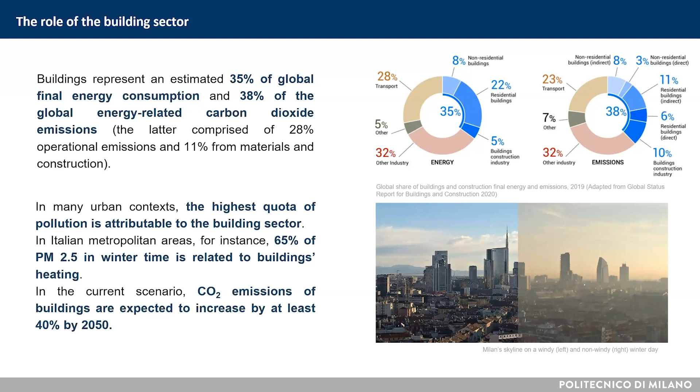65% of particulate matter 2.5 pollution in winter time is related to building heating. And the CO2 emissions of buildings are expected to increase by at least 40% by 2050.

The overall building stock currently accounts for around 245 billion square meters, and more than half of the existing stock is likely to still be in use in 2050. So the energy renovation of existing buildings is a key element to shift to low carbon buildings.

Obviously we also have to deal with new buildings, especially in some countries like those in Africa, mainly developing countries. But in other countries like North America and Europe, the main focus will be the energy retrofit of existing buildings.

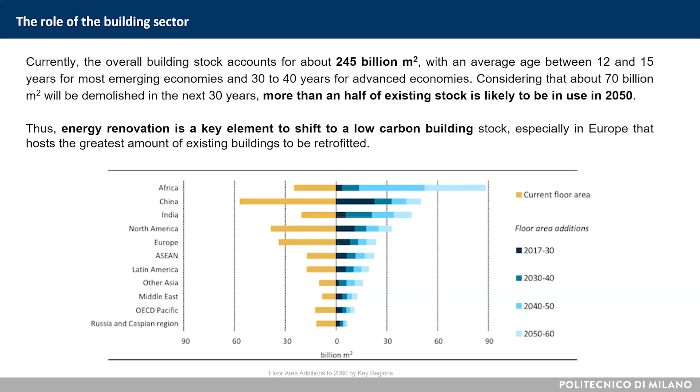First, we have to maximize the building's energy efficiency, mainly with passive strategies. Second, we have to adopt high efficiency technical systems and advanced control management strategies. Third, we have to maximize on-site or nearby renewable energy production and self-consumption.

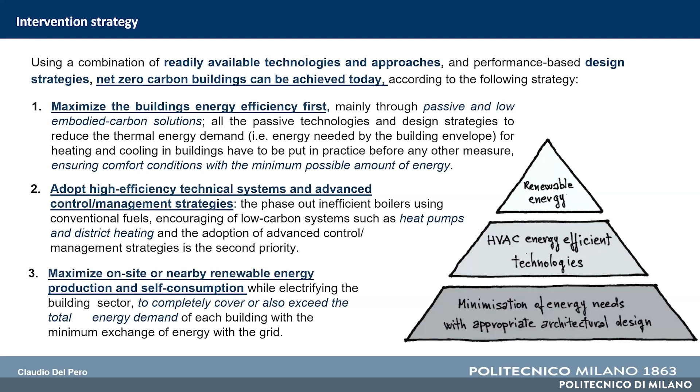Following this strategy, we can transform existing buildings into nearly zero and net zero carbon buildings. So how can we do it? We need an energy manager. We need many energy managers.

As you know, the energy manager is a pivotal person whose task is to manage everything related to energy in a company, in a public body, or in any kind of structure.

The energy manager must verify the energy consumption, optimize it, and promote interventions aimed at energy efficiency and the use of renewable sources. The scope of the energy manager is to analyze and assess an existing building.

The energy manager assesses how the existing building or structure is consuming energy, and puts into practice all the interventions and strategies to strongly decrease this energy consumption and increase renewable energy source utilization.

That's why we think this course, Energy Management for Real Estate, is particularly timely and important right now. More in detail, today you will attend this webinar, a practical application on how you can apply your knowledge to an existing industrial building to strongly decrease its energy demand.

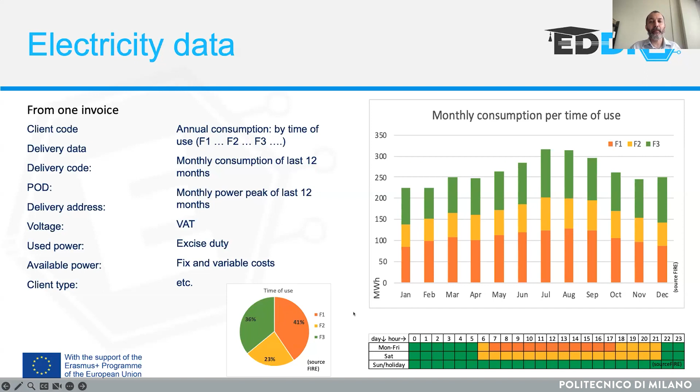But you can also usually get hourly data. The point is you may get these hourly data—this is data of electricity, for instance, coming from the grid. Looking at this, 00 is midnight.

You see it's a bit of a strange situation, because in this real case there's a lot of consumption at midnight. This should make you think, and eventually you can also see that this user doesn't buy much energy from the grid.

So you need other data to see what the hourly consumption actually is. In this case it may come from a combined heat and power cogenerator following the electricity demand. It goes on, then produces, then at a certain point when the heat demand is lower, or there's no heat demand, it goes to zero—but it never produces more than the electricity need of the site.

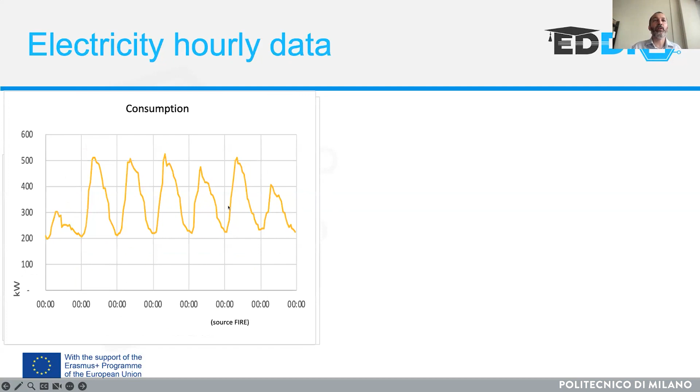We'll concentrate on this yellow curve, and you'll have quarter of an hour or hourly data. Then, what can you do with this data?

Well, there are a number of things you can do. I see that some of you are used to having this kind of data—so what can you do with it?

Something quite simple when you have this data is to prepare a load duration curve. In this case it's very simple to make. Think about how you would construct this kind of curve—you can see that it's always going down, so you may understand how to do it.

Otherwise, I will tell you in a while. You can see this could be very useful to see the peaks, how many hours or quarters of an hour you have those peaks each year. And then you can do some averaging.

The monthly average, so average month by month, the daily curve hour by hour by month, or the average day of the week yearly. So you can see that Sunday there's not much consumption, but there's some kind of activity on site.

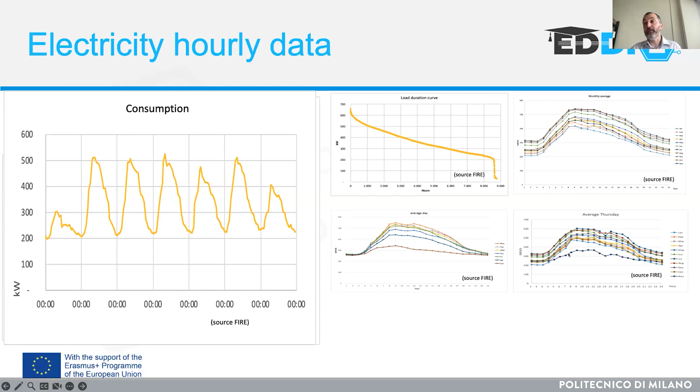Saturday is a bit different, and the other days are quite similar. And then you can focus on a particular day and see how this changes month by month. You see, for instance, there are some months, the colder months, where you may have some maintenance, or less consumption for cooling, and so on.

And then you can also do something like this with all of the data. This is also called a carpet plot. So you are visualizing in just one image all of the 8,760 data points, and you see how it goes during the year, but also during the day, and if there is any kind of strange data here and there, you can immediately spot it visually.

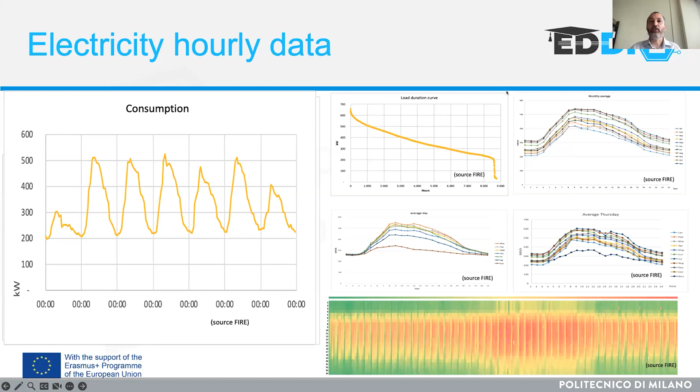This is very easy to do - you just do conditional formatting in Excel. And this one, the load duration curve, is just ordering the numbers from the highest to the lowest one. You can do similarly.

You do this for natural gas data, and here you have the monthly consumption, but you can also have hourly consumption. Now, at least in Italy, we have hourly meters, also if you are a large user, with correction not just for temperature, which is already standard for domestic users, but also for the calorific value of the natural gas consumed. So that could make the data much more reliable.

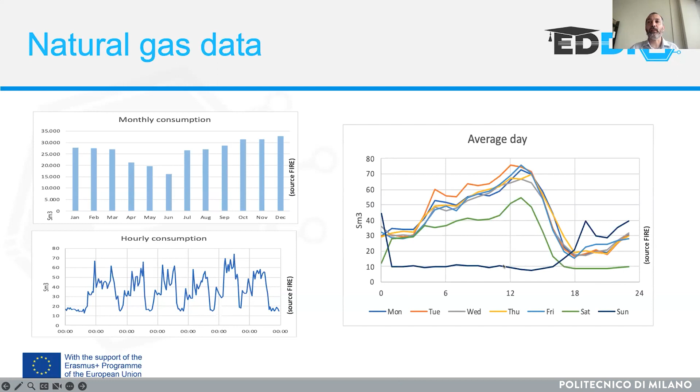And here again, we can have an average daily use, and you see that on Sunday there is some kind of activity at a certain point. So these are the energy vectors, but you can also have liquid energy vectors like oil, gasoline, and so on for transport. It depends where it is located.

Now we are also looking for relevant variables. So if you are in a process, typically it's the production - the number of product by day, by month, by period of time, and the mix of product.

But please also try to think of other relevant variables, the variables that are influencing the consumption. This could also be, for instance, the number of work shifts or man-days - other variables you may like to use. And if you have important consumption for heating and cooling, typically the outside temperature could be important, also in some cases for the industrial production sector.

But it's usually one of the most important relevant variables for buildings alone, along with the humidity and work shift or opening hours, also for the buildings.

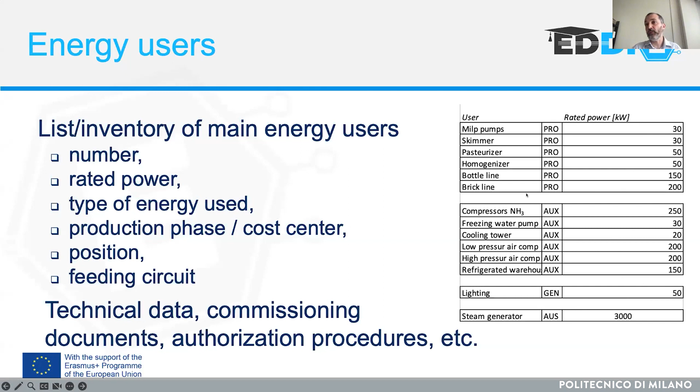So you may get something like this - a list of users, where this is for production, auxiliary services, general services, and auxiliary, and the rated power of those kinds of systems. The first part are just, yeah, all of these are electric powers.

If you are looking for a process, you will ask for a site layout, so you see the productive lines, because usually there is more than one. This is just different steps, but one kind of path. In other kinds of production, you may have different paths. This is simplified, but in reality, you may have different paths for different kinds of products.

Then you are receiving the raw materials or semi-finished goods, and there could be a warehouse, eventually a cold refrigerated warehouse for this kind of material. Then after production, you have palletization, a refrigerated product warehouse, and then shipping. So you receive and then you ship the products.

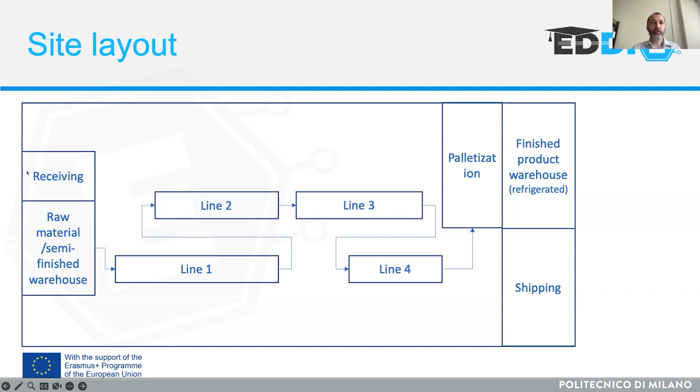But then you need to look at all of the systems and services you need for production: water, and usually also softening of it. Usually in industrial sites you have a well, while in buildings you are connected to the water network. Then there is a boiler room, air compressor for industry, chillers room. Then for internal logistics, the forklift, so the charging station, and the electricity transformer. All of these have different distribution networks for electricity, compressed air, hot water, steam, chilled water, and so on.

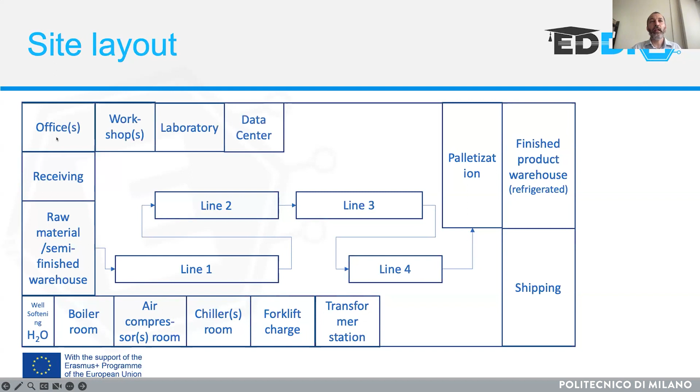Then you have offices, workshops, laboratories, and a data center is always present, smaller or bigger, here and there. And then you have the HVAC for offices, data center, and eventually also for the production parts, the lighting. So we could divide these into auxiliary services and general services, because this is going on even if there's no production at that time.

Then at the end, we have the treatment of wastewater and other byproducts or waste, but now it's more byproduct. And then you should also check if and how to valorize those byproducts.

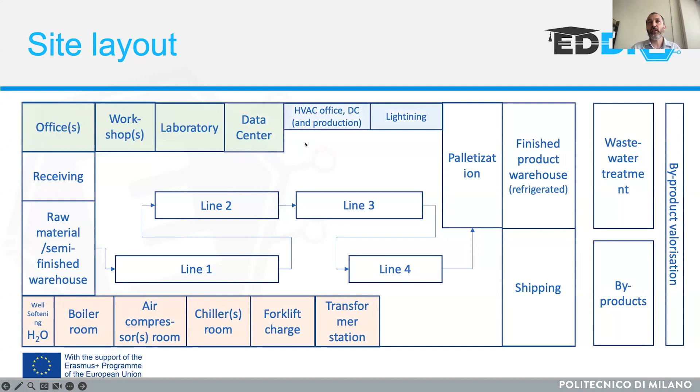So here you have auxiliary services. Then this is just some kind of offices and other parts not directly needed for production, but needed for the site, for the organization. And here are the general services.

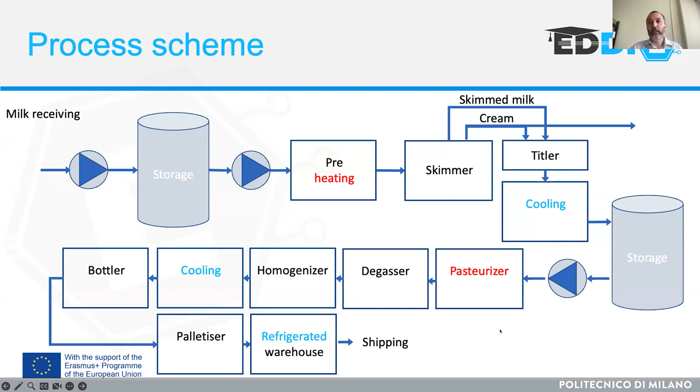So this is just a scheme, for instance, of fresh milk production. You receive it, preheat it, skim it, then cool it, pasteurize it, and then bottle it, and then refrigerate before shipping. Those are all of the steps, just as an example, because we will see some in the next slides.

So what data are you going to collect: systems, conditions, use, and issues — there are always some smaller or bigger issues going on with the existing system — and the attitudes of the users and maintainers, and the proposals you may collect. And eventually you will need to do some spot measurements.

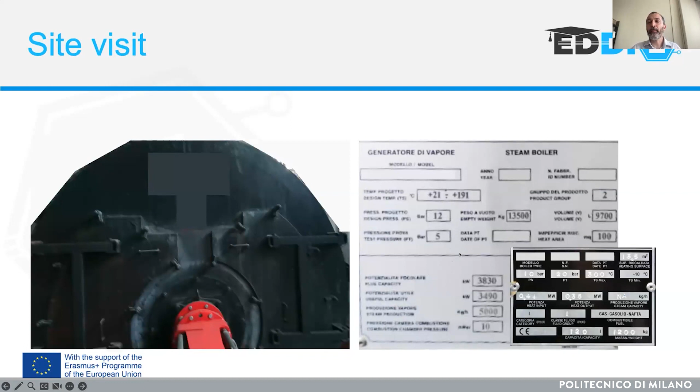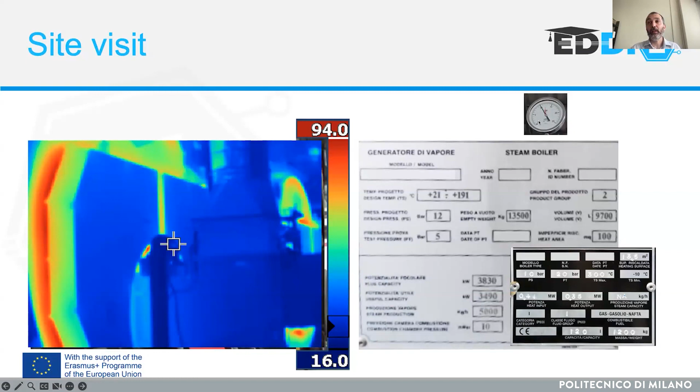But you can also, if you are interested in knowing the temperature, look at the pressure meter. In this case, that's 10 bar of pressure, so the temperature is of the steam. Since we're at 10 bars, the temperature of the steam, if you look at the steam table, would be around 180 degrees. What you can see with the thermal camera is if you're looking at some of the small pipings getting out from the upper part of the steam boiler.

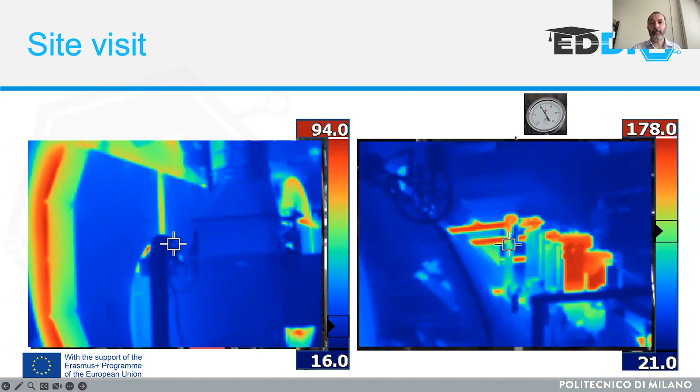With the thermal camera, you can see if there is some energy waste, and you can also understand the temperature. Here is a high pressure air compressor used for the production of plastic bottles, where you bottle milk or water. You can see here quite high temperatures, so you may evaluate if you can recover some of this heat.

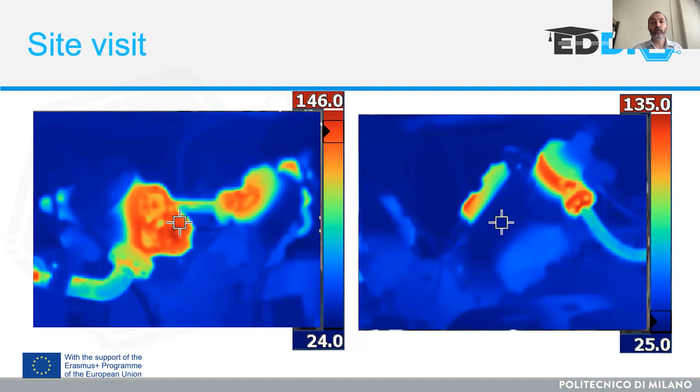If you watch the process, one of the big users of energy could be the air compressor. This usually could be up to 25% of the total electricity consumption, for instance in the chemical industry and other particular industries.

Just to give you some indication: there are other kinds of data tags you can find on different compressors, and you should read the rated power and eventually the type of compressor, so you know the manufacturer and the model. Also the year could be very important, so you understand how old the compressor is. When looking at the data, the model is needed so you can retrieve more information from the web. If it's a very basic model, you will see just the pressure.

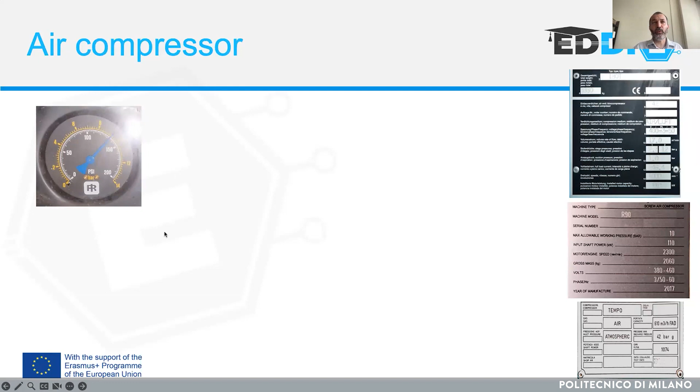As you can see here, the pressure is quite high, around 9 bar in this case. That is quite a high pressure. Usually it's better to stay around 7 or just a bit above 7. 9 could be high, and this means a higher consumption.

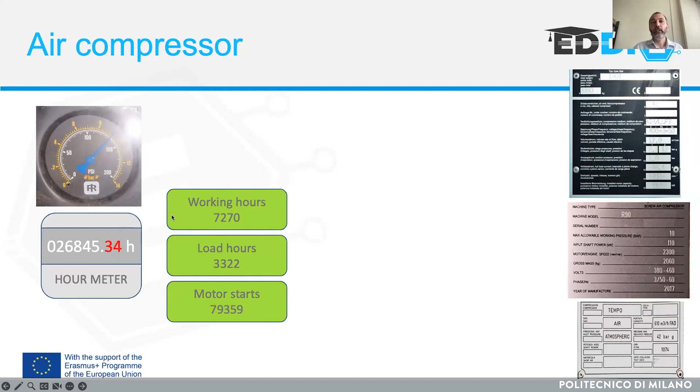On a very basic compressor, you will have only an hour meter. On more advanced and modern ones, you can have total working hours, load hours, and motor starts. This is a load-unload screw compressor, so it has a valve to reduce the load without turning off the motor, because an electrical motor cannot turn on and off too many times an hour, otherwise it will overheat and burn, and then you have to change the motor. This is why there are load hours and a lot of non-load hours, with a consumption of about 30% without any production of compressed air.

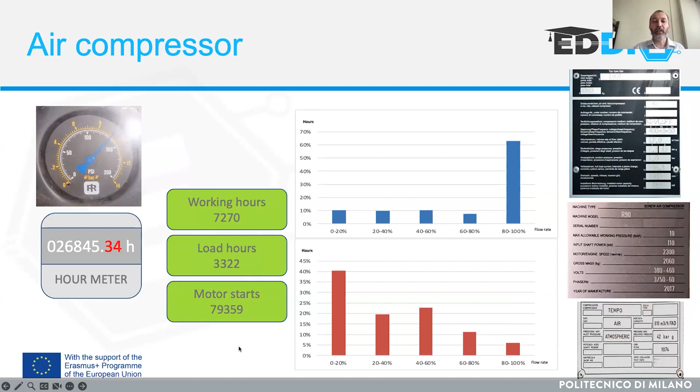Here is a more advanced compressor with variable speed drive, showing how many hours it works at different partial loads. In this case it works mainly at nominal load, but in the same compressor room there was another compressor working much more at partial load. Just to give you an idea of what you can see and retrieve by playing with the control units inside those air compressors.

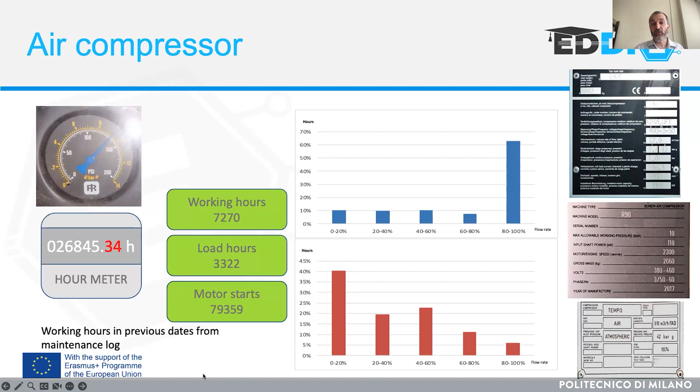You can also check the maintenance registry, the maintenance log, to see the working hours of the compressor in previous dates. That could be very useful to know how many hours it worked more recently.

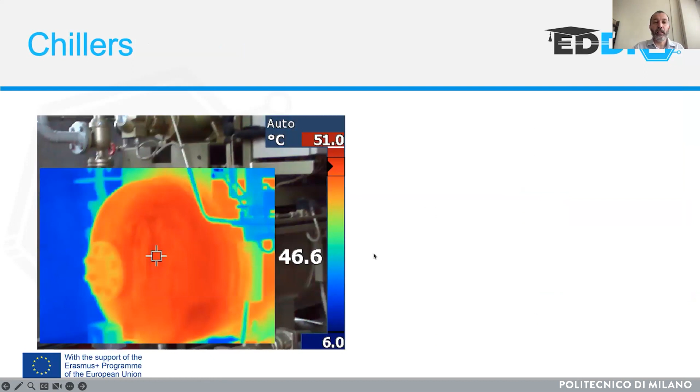Similar things you do also with chillers. In this case, those are ammonia chillers, large chillers for industry, because ammonia requires a lot of attention, so it's more for the industrial sector.

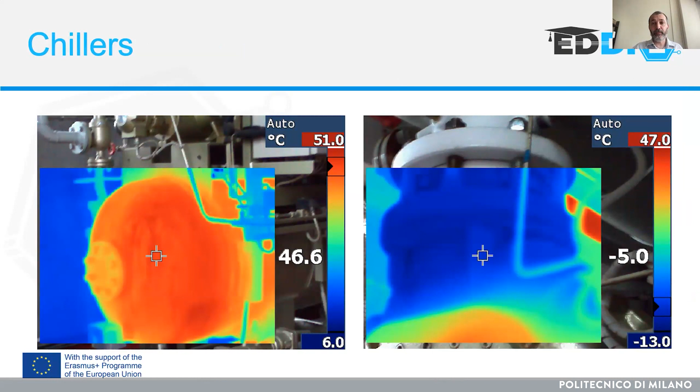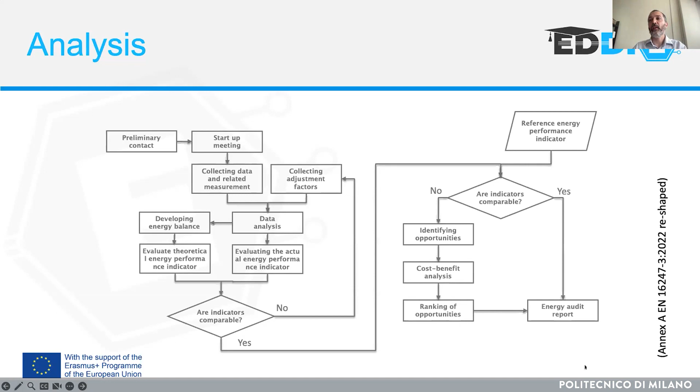Then you identify opportunities, do a cost-benefit analysis, and then rank and select the opportunities considering this cost-benefit analysis. And then you end the energy audit.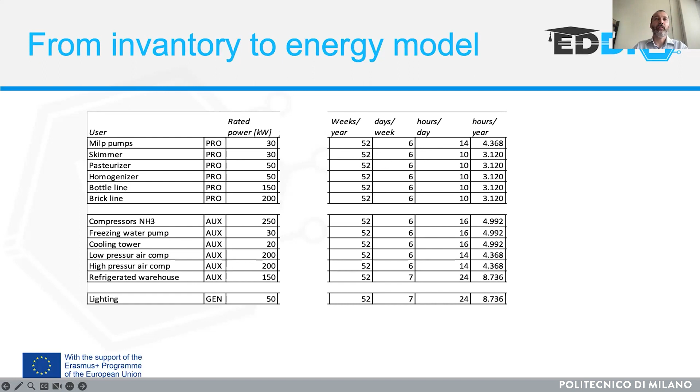This is an example from the inventory I showed you before. You just ask the people inside, when you do the site visit, how many hours per day that system is used.

Then you have the hours per year, and then you put a utilization factor, that is the difficult part, because the other is quite straightforward. In this case, it's very low when we have more of these. For instance, for a low pressure air compressor, you have usually at least two air compressors in a compressor room, and also more chillers in a refrigerated warehouse, and so on. So giving those utilization factors, you multiply rated power by utilization factor, and then you multiply by the hours, and you obtain the energy.

This is the total energy from the bills, or from the invoices plus on-site production, and so you need to converge to this, in this case, with other consumption. You don't need to arrive exactly to these numbers, because usually there are some other users that are not listed, or even if they are listed, there may be some small uncertainty. This is quite an uncertain approach, so you don't really need to have this exactly the same.

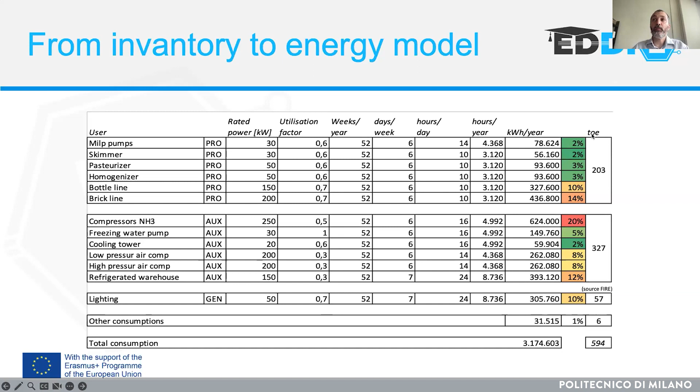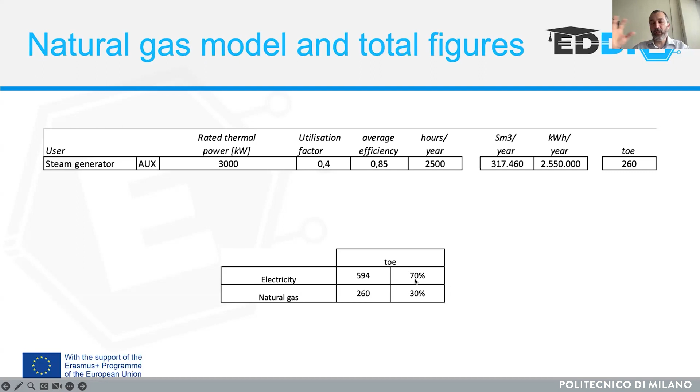And then we also transform this into tons of oil equivalent, so we can sum also the natural gas consumption, and present this as the total consumption and the share of it in tons of oil equivalent. The share could be much more similar between electricity and natural gas if we were using watt hours of electricity and thermal watt hours, while ton of oil equivalent is more linked to the primary energy, so it's much higher for electricity.

At this point, we are going to find the energy performance improvement measures, the opportunities. To do this, we could have plug and play ones, so we just change a bulb, or ones requiring some changes. For instance, if we want to switch from steam to hot water, we will have to change a lot of the pipings and many parts. And then there are process-specific ones, if you want to change a specific part of the production cycle, and so on.

Usually, in an energy audit, you go for cross-cutting and plug and play measures, and eventually ones requiring some changes. While this other part is more for production innovation, or someone who has a lot of experience in that sector.

This is just a quick list of what you can do, for instance, for compressed air. You reduce the delivery pressure. Roughly, if you reduce 1 bar of pressure, it's about 8% reduction. So 2 bars is almost 20%, 16% or so of reduction.

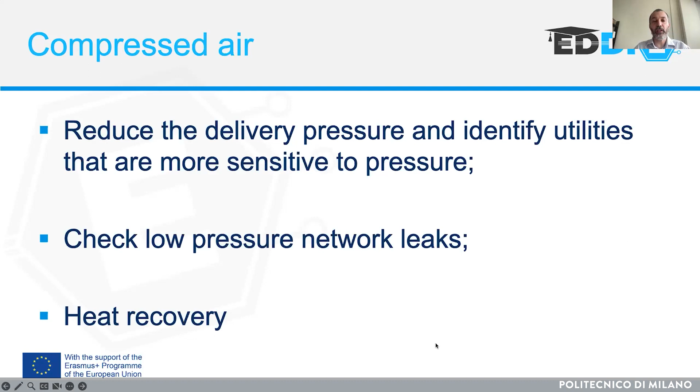Energy delivered to the process, and then you can recover, because there's a lot of, as I already said, 80 to 90% of the electricity transformed to heat, and you can try to recover it. Then there are also the chillers. If you are cooling, there's a lot of heat that is dissipated, about 3 times the electricity used by the chiller usually goes out as heat, but low temperature heat.

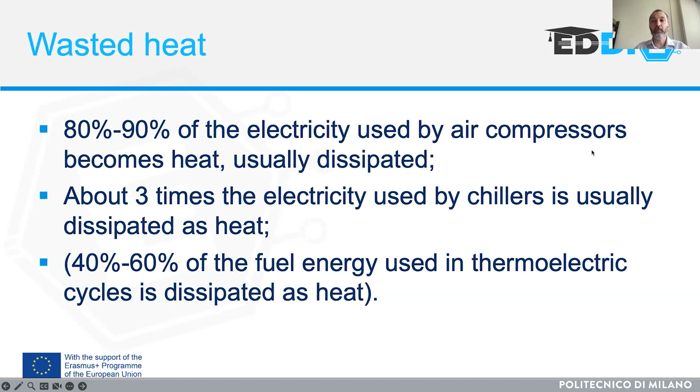So this is another thing you have to understand: the temperature of the heat that you can recover, or that is needed by the system. If you are in a building, according to your distribution system, you may need around 70 degrees if you have radiators, but you can go down to 40 or even less if you have fan coils or a radiant system.

In the same way, in process, you will find high temperature water and high pressure steam, but at the end the user may need much lower temperature. For instance, in the example of milk, just for pasteurization of fresh milk, you don't need any steam. Pasteurization is around 60 to 75 degrees. And even if you have extended shelf life or ultra high temperature treatment, you go up to 100-something or 130 degrees centigrade. So you don't need the 180 degrees of steam that we saw before.

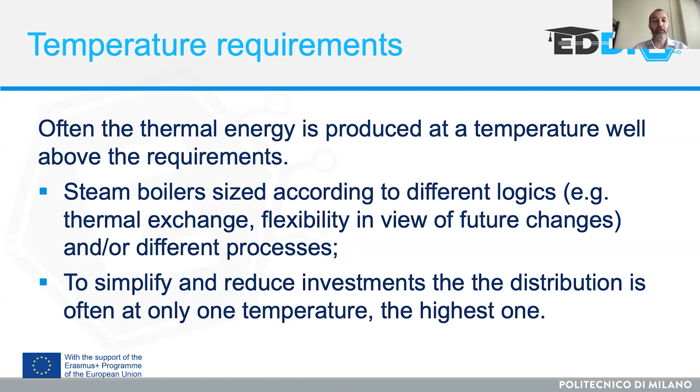It's just that in the past you raised the temperature a lot. Now we need to check this too, because it's additional consumption.

What we can also do, another kind of waste is when you produce electricity in thermoelectrical facilities, part of the energy of the fuel is wasted. So if you produce the same amount of electricity while also recovering the heat with CHP, combined heat and power, then you could reduce the consumption of the fuel.

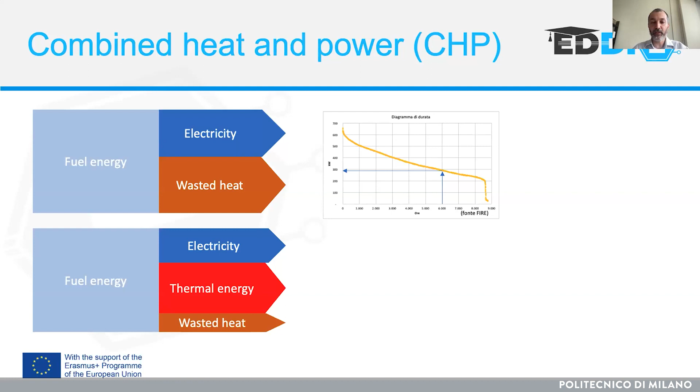Then there are other energy performance improvement actions, like a monitoring system, which could be very useful to collect more data, improve your evaluation, and improve the management of the system.

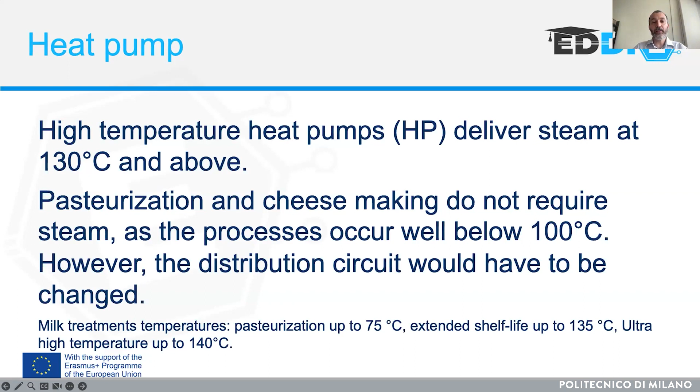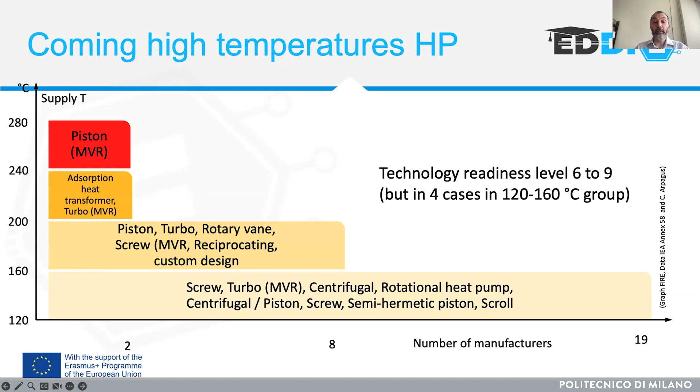And to finish with another interesting topic, where you have cold and heat at the same time, like in the dairy industry but also in some buildings - think about data centers and so on. Heat pumps: now there are heat pumps available reaching 130 degrees centigrade, and new ones going much higher, already proven in real environments. So these could be additional opportunities.

To finish, what you have to do at the end is prepare the energy audit report. You describe the energy performance improvement actions, eventually their interactions, and for each action you give economic indicators like net present value and profitability index, and so on, plus an indication of how you do measurement and verification.

How can you foster implementation of the opportunity? For instance, you need to present this report to the client, possibly in front of some decision maker. Another suggestion is to list in the report the non-energy benefits from each of the actions you found - for instance lower maintenance, better environmental conditions, better production, better reliability, and so on, because those are the points that move decision makers.